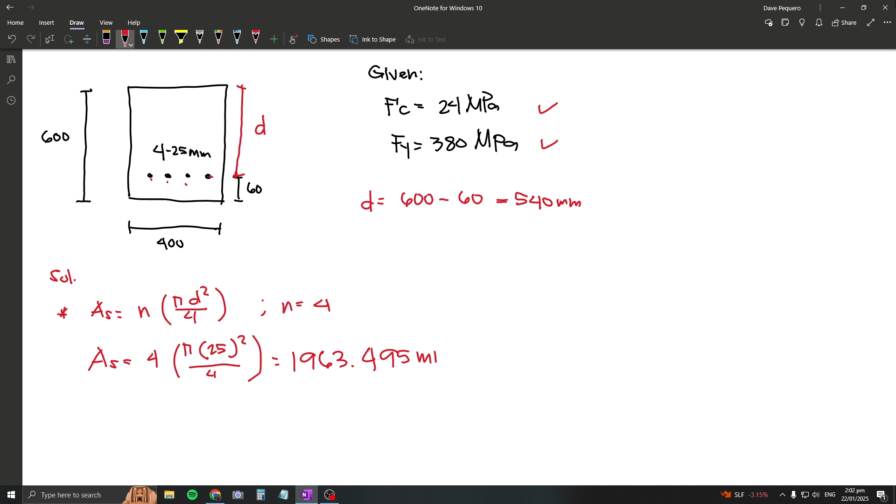495 millimeter squared, so that's the area of steel. So next...

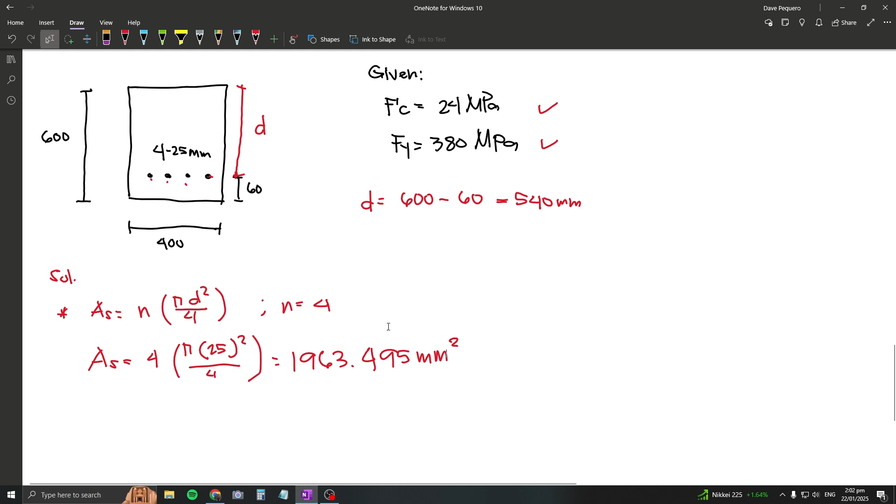Next step we need to do is assume. So second, assume epsilon s is greater than or equal to epsilon y, right? Then fs, epsilon s is greater than epsilon y.

So epsilon y, then fs is equal to fy. So epsilon y is equal to fy over modulus of elasticity.

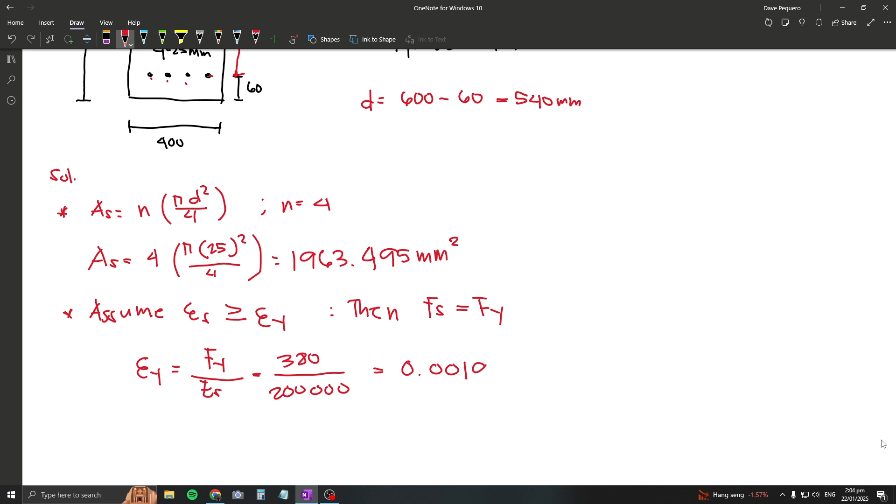So our fy is 380 megapascal, and our modulus of elasticity is 200,000 megapascal. So that gives us 380 divided by 200,000, giving us 0.0019.

So next is solve for A. So A equals As times Fy all over 0.85 F prime c times B.

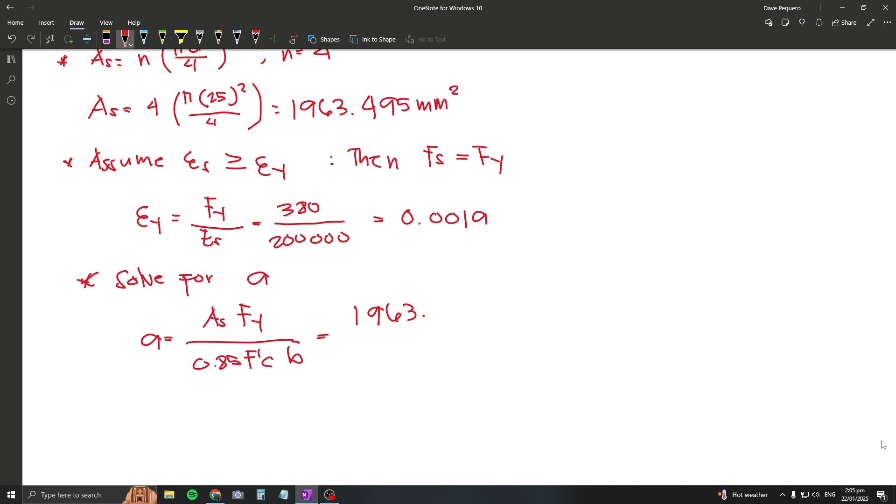So our width, our area of steel is 1963.495, times our Fy which is 380, all over 0.85 times our fc prime, which is 24, times our base which is 400.

So let's calculate, what's the value? 1963.495 times 380 all over 0.85 times 24 times 400. So we get 91.437 millimeter. So next is solve for C.

Next is solve for C, which we get from A equals beta 1 times C.

Take note that our fc prime is 24 MPa, which is less than 28 MPa. So since it's less than that, our beta 1 is 0.85. Right? 0.85 is our beta 1.

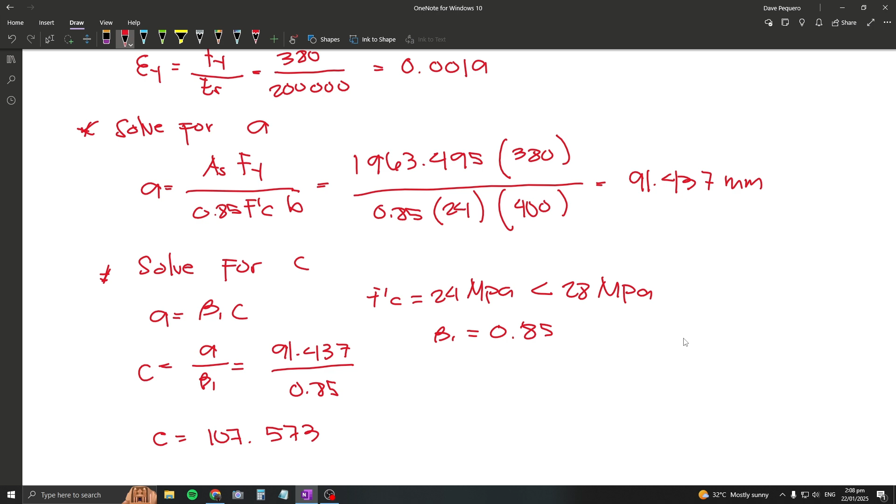So 91.437 over 0.85, giving us the value of C, which is 107.573. So our value of C is equal to 107.573. So next step is to verify our assumption.

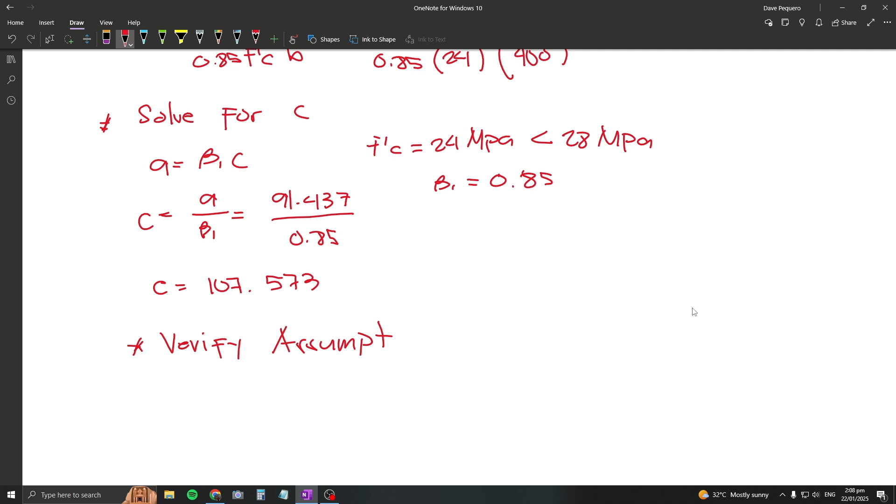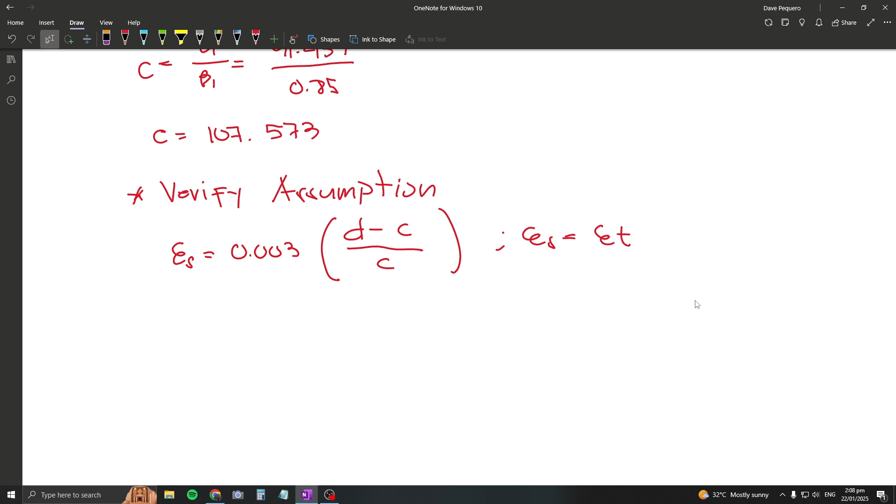epsilon s equals 0.003 times d minus c, all over c, where this epsilon s is equal to epsilon t. Is that right? Epsilon t. Let's check. Epsilon t, okay.

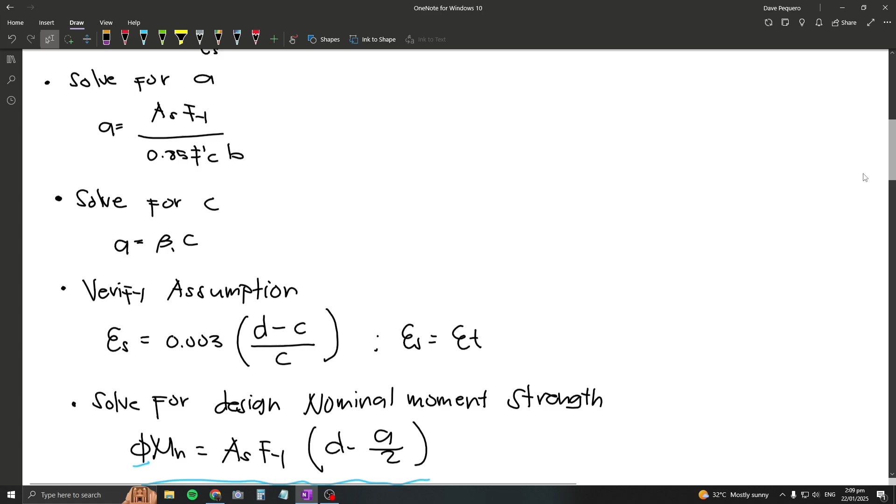That's right, so let's substitute the values. Epsilon s is 0.003 times d, which is 600 minus 60, giving 540, minus 107.573, all over 107.573. So we get ES equal to epsilon t.

So epsilon t: 0.003 times 540 minus 107.573 all over 107.573. So we get 0.0121.

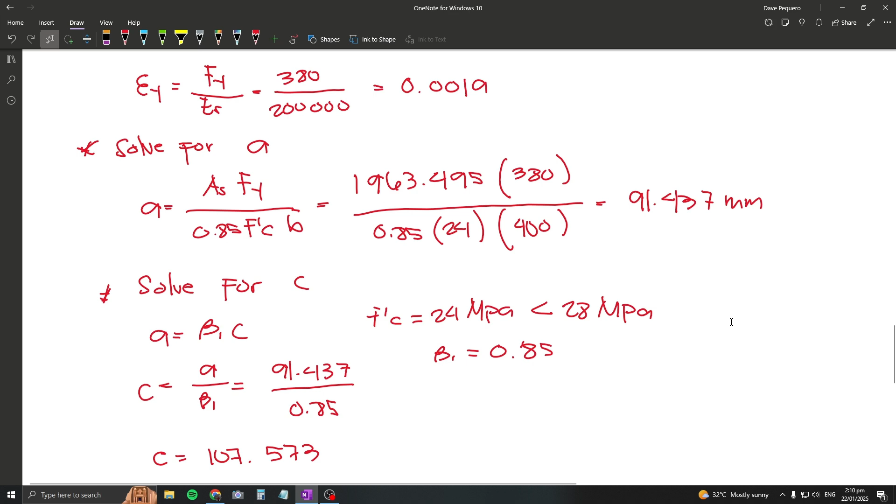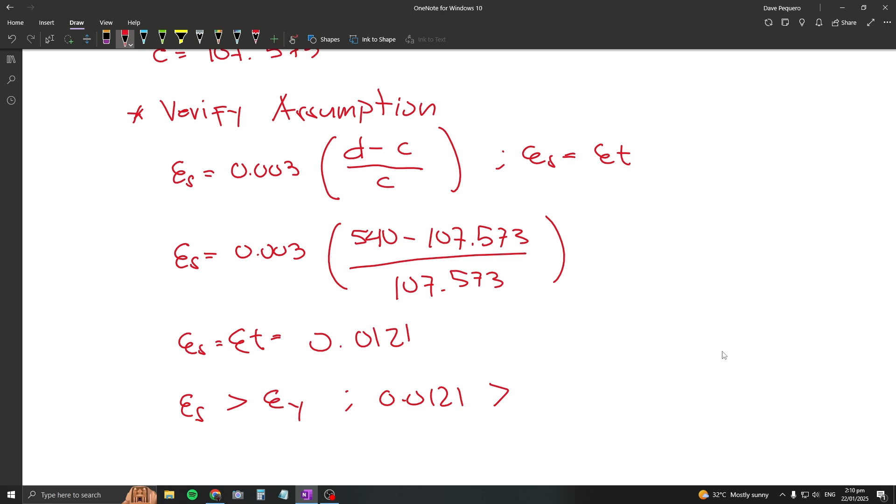So 0.0121. So epsilon s is greater than epsilon y. This epsilon s is 0.0121, and our solved epsilon y is 0.0019.

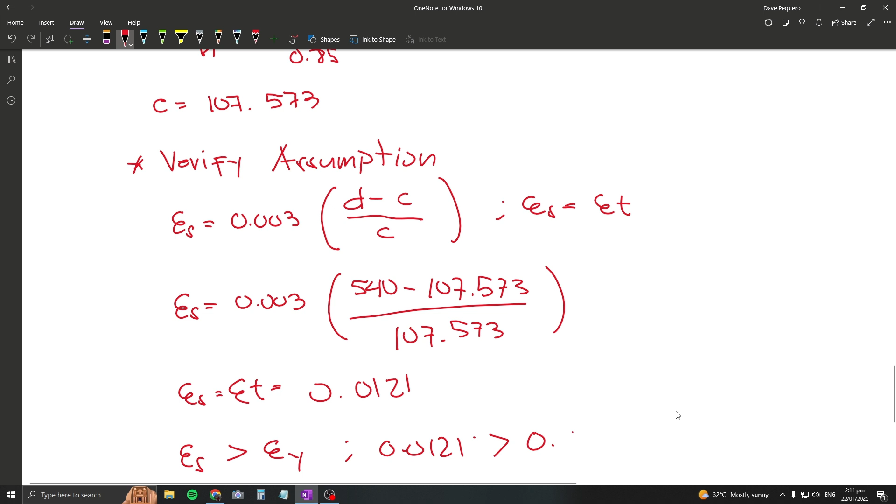So assumption verified. So since epsilon s is greater than epsilon y, then...

fy is equal to fs since they're equal. Since epsilon t is greater than 0.005, so it's greater than 0.005.

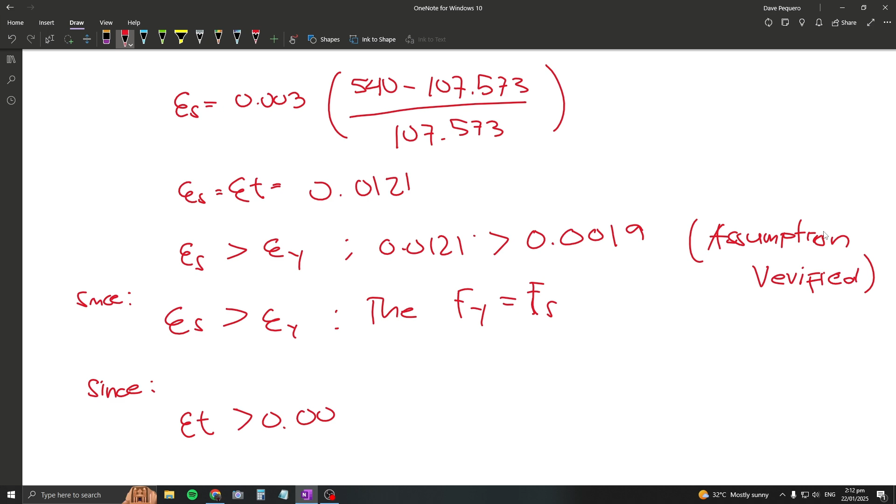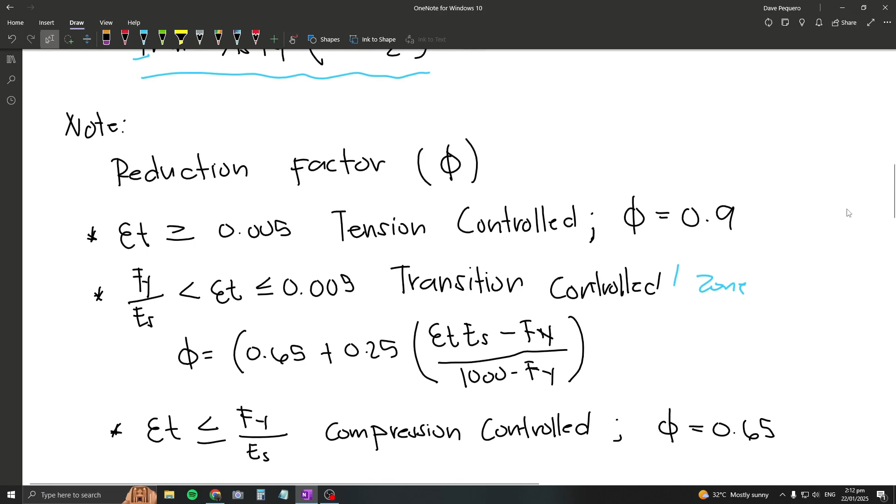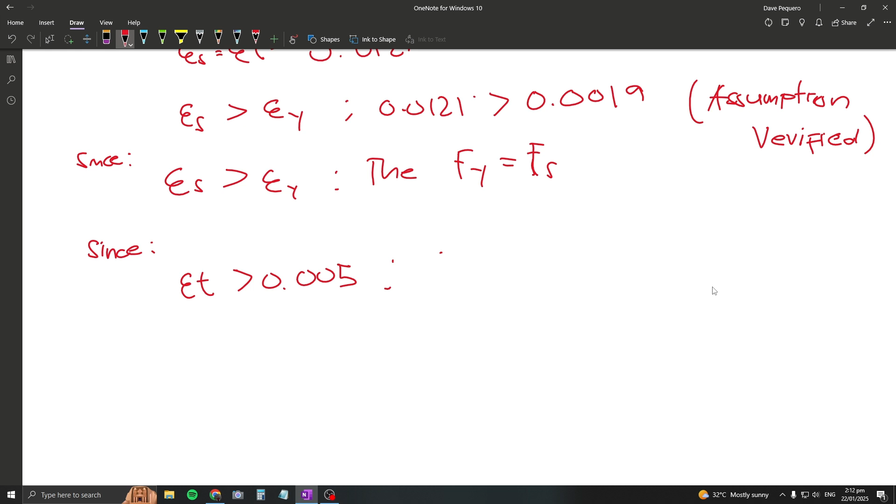So since epsilon t falls in this range according to our sample, since epsilon t is greater than 0.005, therefore it's tension controlled, and our reduction factor is 0.9.

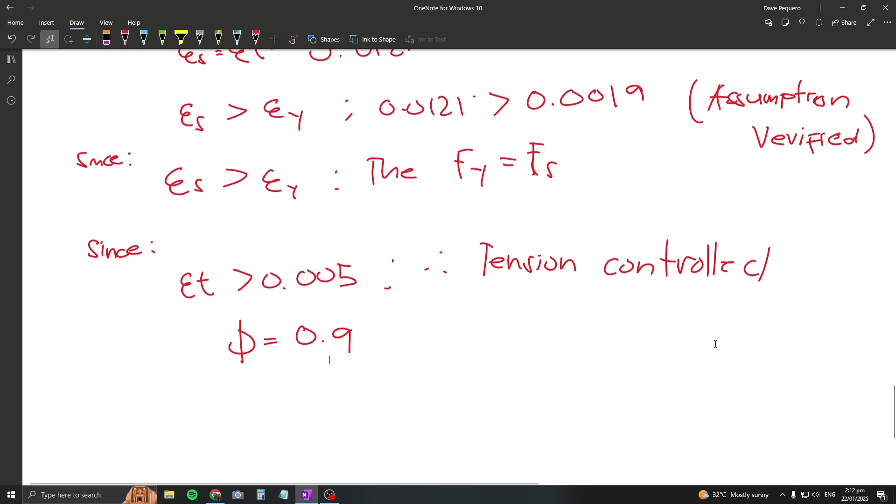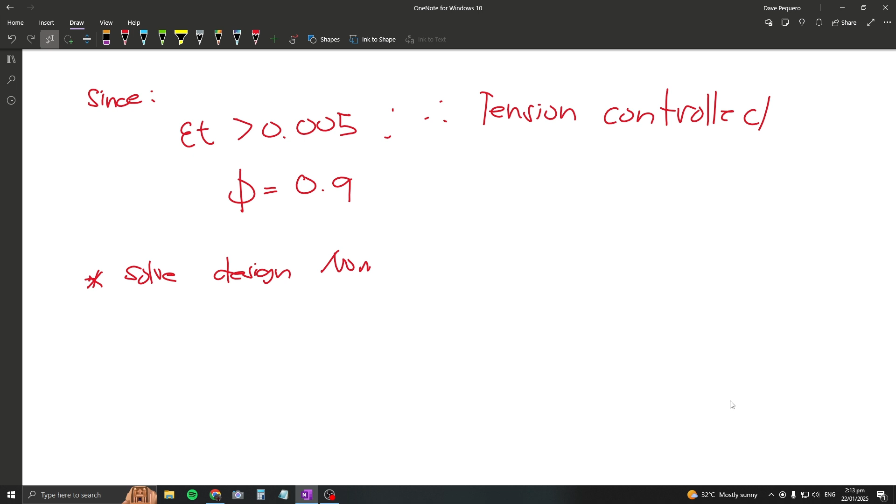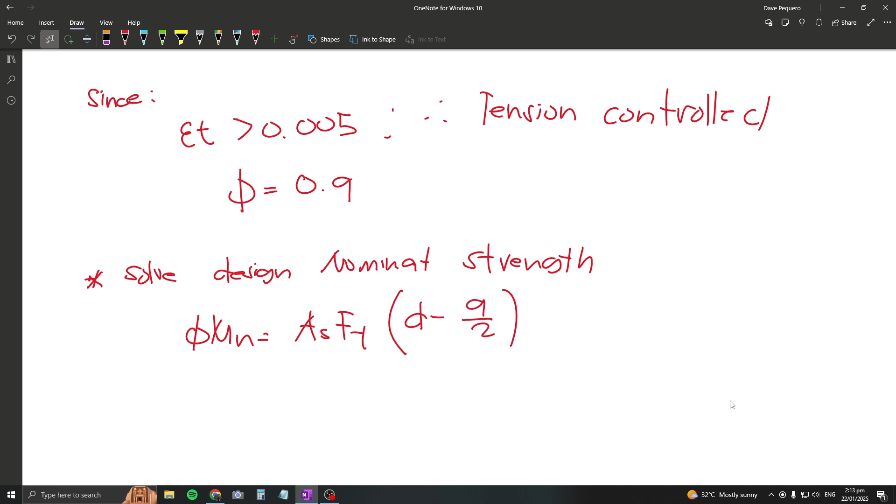So last step is to solve for the design nominal strength. So we get Mn, which is As times fy times d minus a all over 2. Is that right? Let's try our formula.

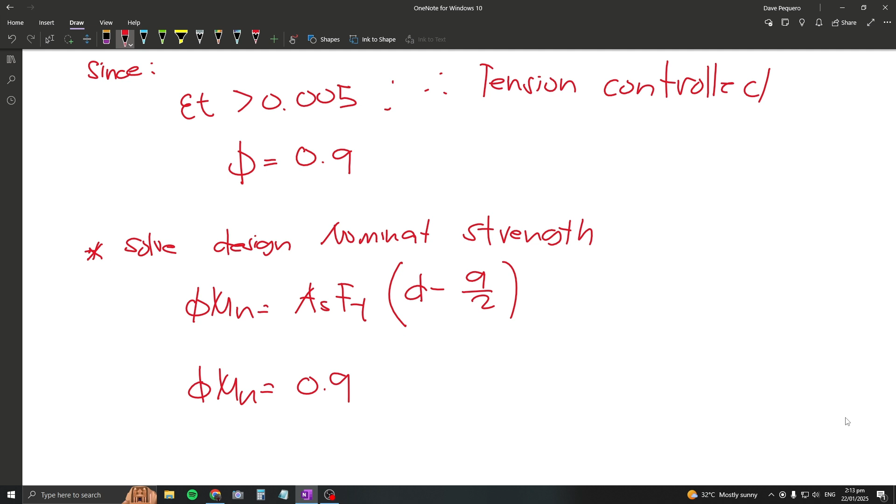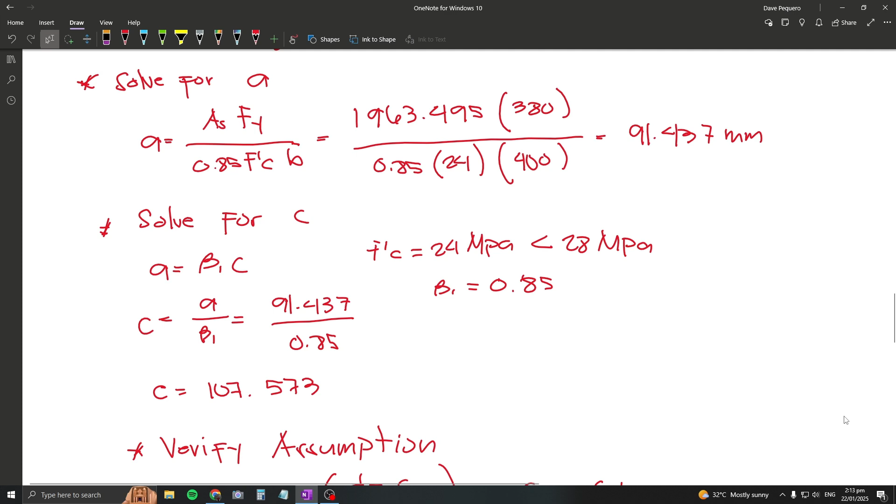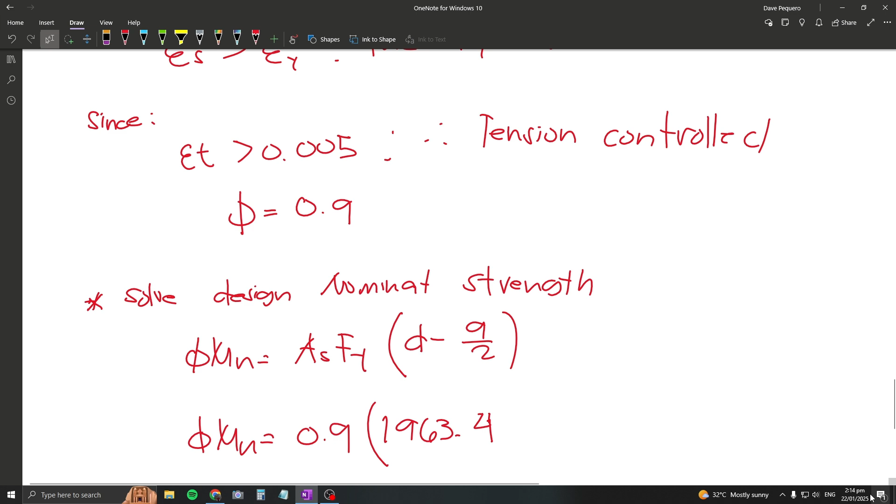So let's substitute. Mn is 0.9 times our area of steel. What's our area of steel? Our area of steel is 1963.495.

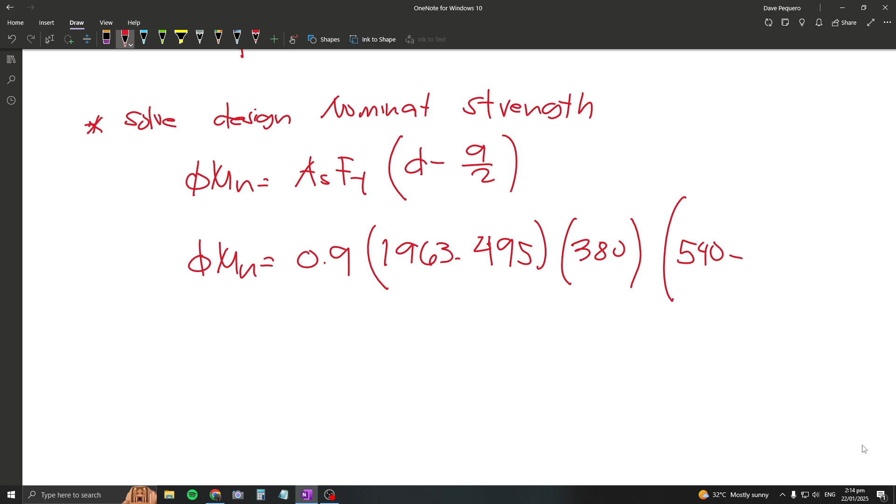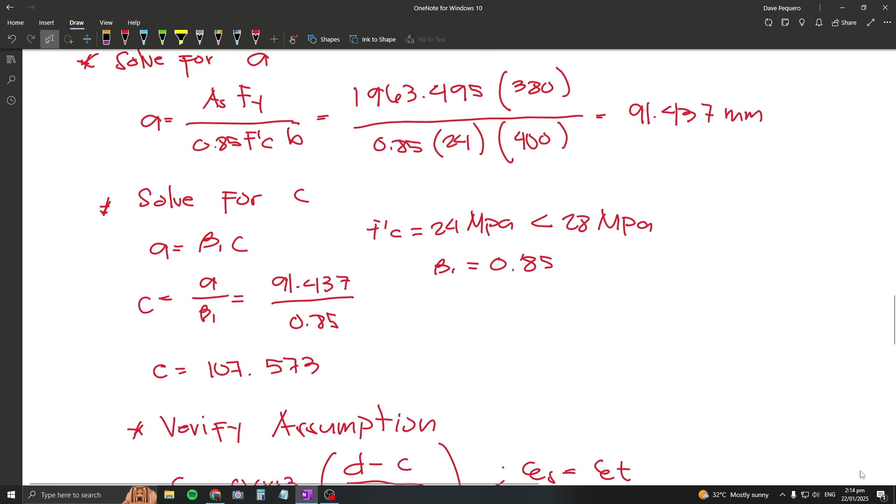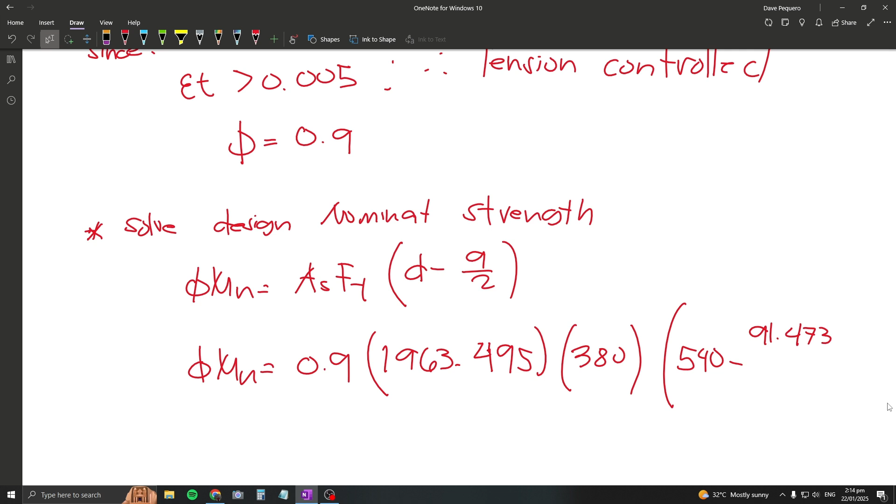So 1963.495 times our fy which is 380, times our d which is 540, minus our a which is 91.473, all over 2. So we can get Mn.

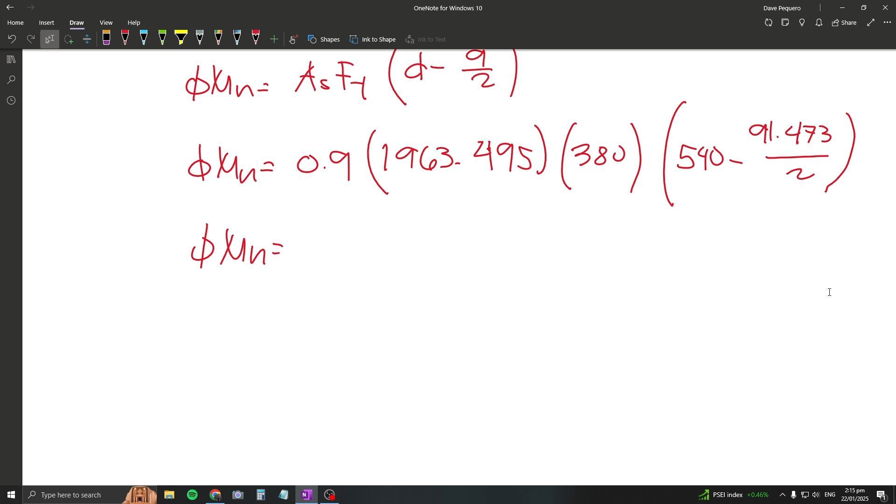So let's compute: 0.9 times 1963.495 times 380 times 540 minus 91.473 over 2. So we get...

By the way, the result is still in millimeter units. So let's just divide it by 1,000 to convert to meter. So divide by 1,000, giving an answer... but wait, we shouldn't divide by just 1,000.